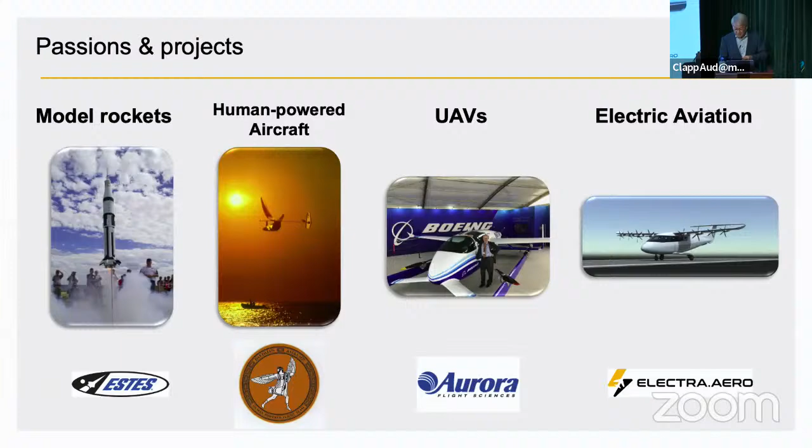And the model rockets played a big role in my upbringing, and as Day mentioned, our family had a chance to be a part of keeping that 70-year-old business going precisely because it's such a STEM education tool. A lot of human-powered airplanes, 30 years or so in the unmanned aircraft space, and now working in the sustainable aviation space, electric aircraft and the like.

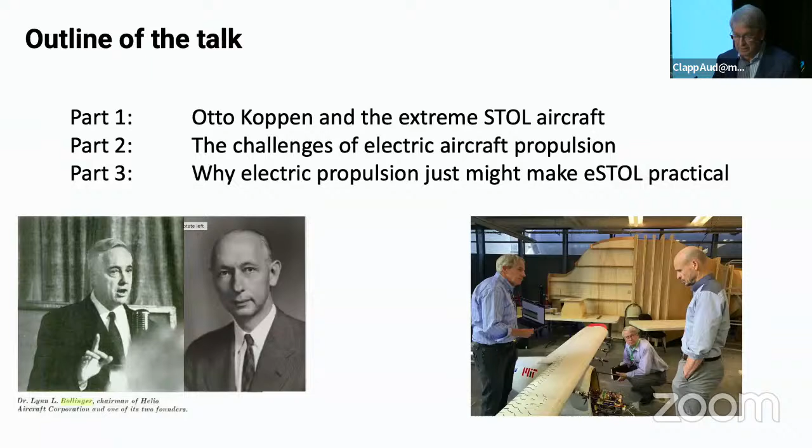What I wanted to do tonight is split the comments into three broad categories. First, to tell a local story, a professor from MIT who spent much of his life in Centerville, very close to here, and some of you may have heard of him. His name was Otto Koppen, and I'll talk about that story. I want to then get into why electric propulsion doesn't make as much sense in aviation as it does in cars and terrestrial applications, and then talk about an application where it might actually make sense that I'm involved in with a number of colleagues here. So just for reference, I'll talk a lot about a word called ESTOL, where the E stands alternately for extreme or electric, interchangeably, but short takeoff and landing.

And if you just think of normal airplanes, the commercial aircraft that fly out of Logan, those are called conventional takeoff and landing, and they use runways. They need between 3,000 and 7,000 or more feet of runway, so a pretty big space. Short takeoff and landing, you'll hear that used. Some of the things like Cape Air flies kind of fall into that category. They need between 1,000 and 3,000 feet of runway to take off and land.

Then you have your vertical takeoff and landing stuff, where helicopters are the most obvious part, but lots of other permutations on that. And those can take off in like one body length of the vehicle, so 50 to 100 feet of space. And that's the kind of stuff you fly out of the Falmouth Hospital here on the med flights back up to Boston. What we're doing in the ESTOL business is the extreme short takeoff and landing.

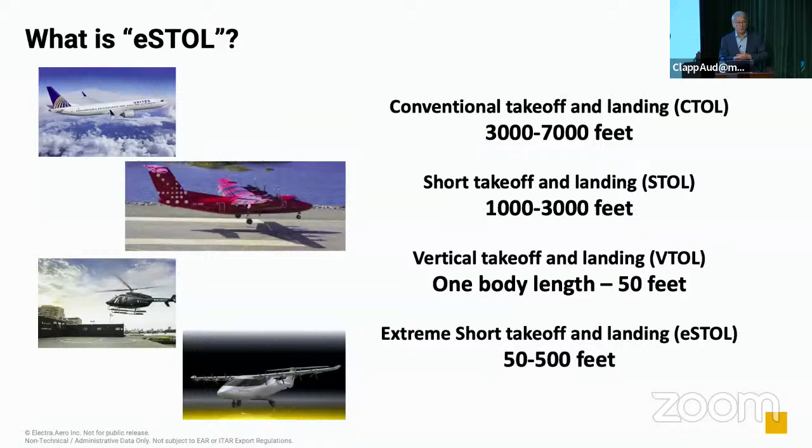So it's almost as short as a helicopter and significantly shorter than anything else that is out there. So 50 to 500 feet, which is an order of magnitude shorter space requirement than anything else. So we like to say that in that field, we're using wings, but not necessarily using runways. And that's sort of a key concept here.

So the Koppen story. Otto Koppen was born in 1900 in New York. He was part of the development of American aviation. He went to MIT. He worked for the Ford Motor Company when they were building airplanes in the 1920s. He spent most of his career on the MIT faculty, where he became one of the world's leading experts in stability and control. But what I've really come to appreciate, I heard his name when I was a student there. He had retired in the 60s and relocated down here to the Cape.

But he was a passionate advocate of these very short takeoff and landing aircraft, and teamed with a guy from Harvard University, a professor at the business school. In the 1940s, they started a company called Helio Aircraft to try to build airplanes that could take off and land in really short spaces. This is a picture of one of their airplanes, of their prototype, flying off the athletic field at MIT.

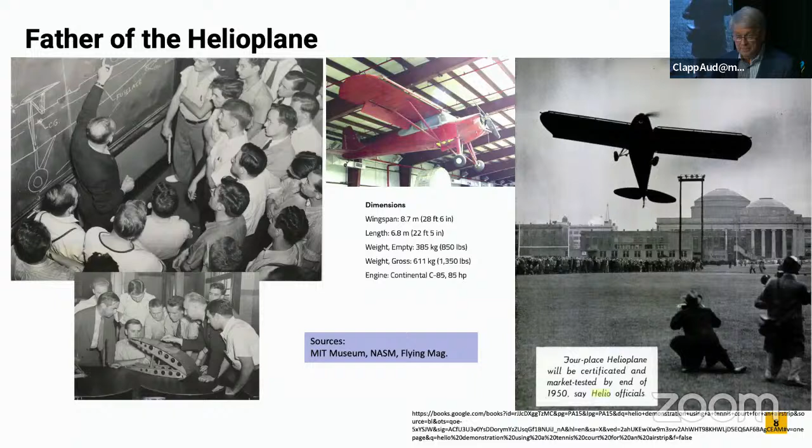And they developed that into a fairly successful business that had a lot of different versions, a lot of different instantiations of this short takeoff and landing airplane, most of which went to various parts of the military, actually. They ended up getting used a lot in Vietnam. The intelligence agencies used them a lot. And the other big user of this has been missionary organizations. People who want to fly into remote areas, land in small spaces, and deliver missionaries, people, and supplies. So those have been the two big users of these airplanes.

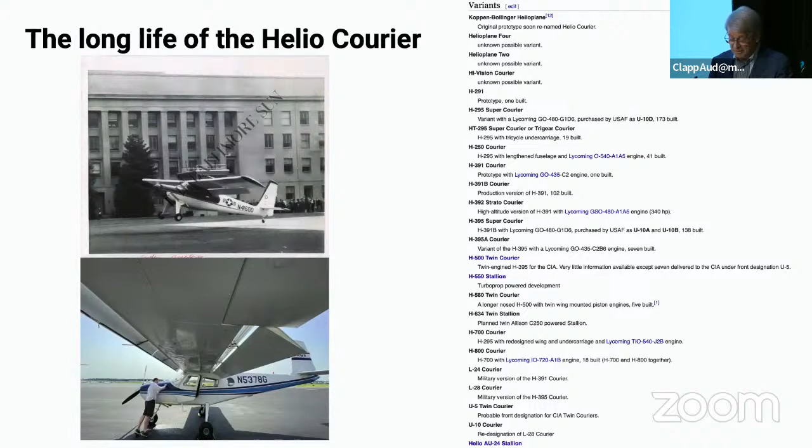So about 1,000 of these were built, and they were far from the only short takeoff and landing. These are just some of the samples. There have always been some of these. All the great powers in World War II had versions of them, primarily for taking people in and getting them out of denied areas. In the 60s, they were building them as possible urban area to urban area transports. NASA did a bunch of research in the 60s and 70s. The Air Force experimented with cargo transports.

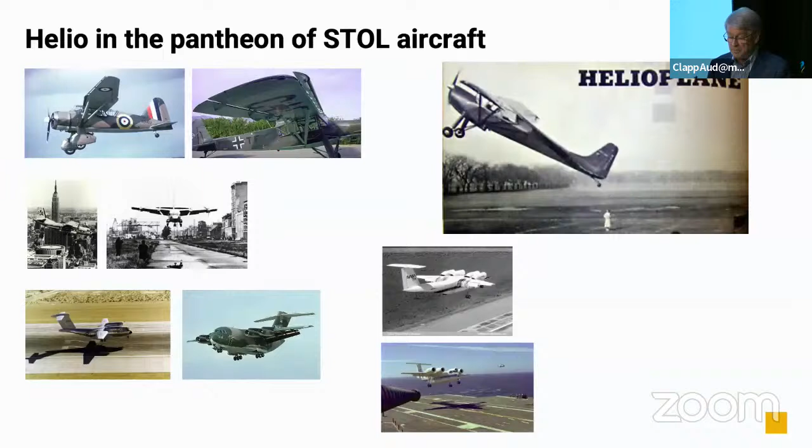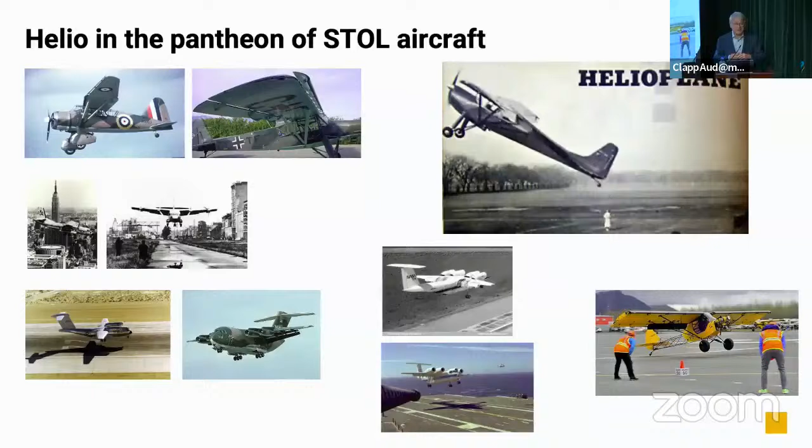And there's a competition every year that you may have seen on TV in, I think, Alaska, where they do the really extreme, like they can get off the ground in like, I think 9 feet is the record, okay? And while those are not practical airplanes, they do illustrate what the technology can do being pushed. That upper right figure here is Koppen's airplane taking off from a tennis court at Harvard University.

Now, few of you have probably ever seen one of these airplanes because they did not become mainstream tools. Those aircraft proved that the concepts worked, but the airplane itself was a lot of work to fly, physically very demanding, had a lot of flaps and control surfaces, and took a lot of the pilot to fly it.

Taking off turns out to be really easy in a short space, but landing is really tough because there's only a short space to land in. You have to hit the landing target very precisely. And again, with the tools in the 50s and 60s, that was a real challenge.

Then, in the 1950s, there was no real infrastructure for what we now would call an on-demand transportation system. Uber revolutionized things, and Uber was possible mostly because of the advent of networked mobile devices, right? The cell phones that could talk to big networks, and you could call a ride from anywhere to anywhere on demand. And that is a really powerful concept, obviously in ground transportation. It's not yet here in air transportation, but it is coming.

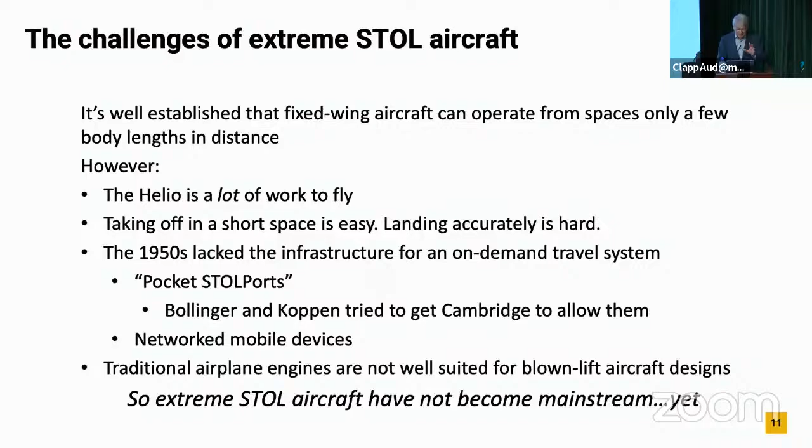And they were actually doing demonstration flights from like the Polaroid facility on Route 128 down to Logan Airport and stuff like that. But it never got to the critical mass to where it became a commercial success writ large. But it did prove out a lot of the interesting ideas. I'm going to set that aside for just a second and now talk about electric airplanes, which, I'll show you how these connect in a minute, but sort of the challenges of electric airplane flight.

And for that, you kind of step back, and there's two big themes, I think, in aviation today. One is crowding and congestion, right? Which was a lot of what has made the experience of flying. The good news is it's made it affordable. The bad news is it's made it pretty miserable because from the time you walk into the airport to the time you get out, you're in very crowded spaces. And obviously in the COVID era, that's brought with it a whole other set of issues.

Second is broadly called Flygskam, right? The flight shaming movement, writ large, the need for sustainability, the need to decarbonize the whole economy. And aviation, although it's a relatively small contributor today, 3-ish% of the global carbon emissions come from airplanes, it's a growing segment, and it's an important segment. And interestingly, it's one of the hardest parts of the economy to decarbonize because, as you'll see in a second, hydrocarbon-based fuels are just really great for airplanes.

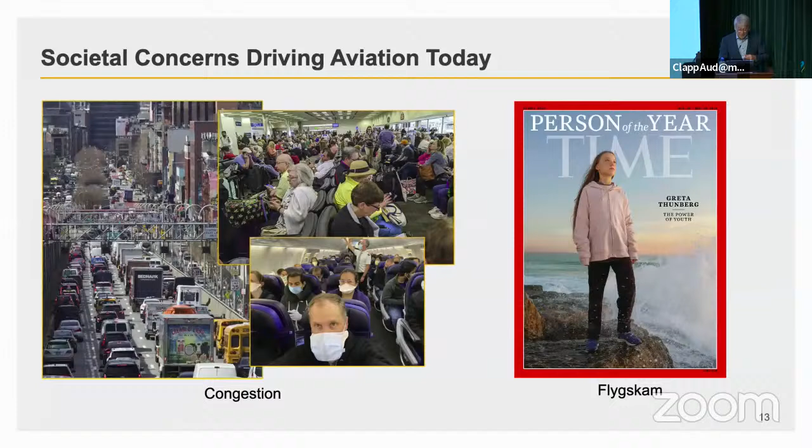So, we live in a world where electric cars are really proliferating. They've entered that stage of very rapid growth. They've moved from this sort of fringe idea, while there's always been an electric car concept out there somewhere, and more than 100 years ago, 120 years ago, there were early model electric cars. The internal combustion engine kind of won that first round, and so all modern cars have been internal combustion. But you're seeing electric really come on in a strong way.

It's still a small fraction of the total fleet, and the rate of production and dissemination is going to have to increase dramatically to get to the kind of decarbonization levels that we need to see by 2050. But it is happening there. It really is happening. So why not airplanes, right? That would seem to be the next step. Consumers, right, are interested. They don't really care what's in it as long as it's safe, it's convenient, it's fast, it's clean, it's quiet, and it's affordable. And the affordability is a really big piece of the equation.

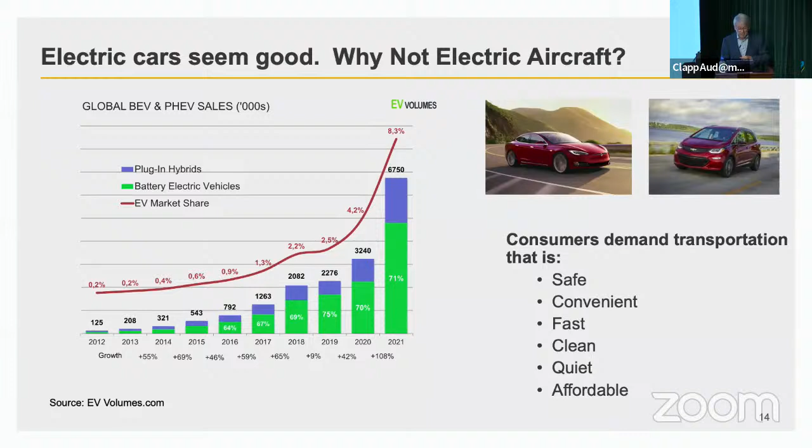And when you look at stuff, first blush, batteries look pretty good. These are sort of four major ways that airplanes could get driven around, I guess any vehicle could: the turboprop, the turbofan, battery powered, and fuel cell powered. And they start with some amount of energy on the vehicle. In this case, turboprops and turbofans, you start with kerosene, right? And then they burn it in an engine. And then they run it through maybe a gearbox and then through either a propeller or a set of fans.

And what comes out that turns into useful work, useful thrust on the airplane, is a pretty small fraction of what you started with, like 30 to 40%. So you're getting like a third of the energy that you started with on board that is actually useful. The rest of it is primarily rejected as heat. Batteries look really good.

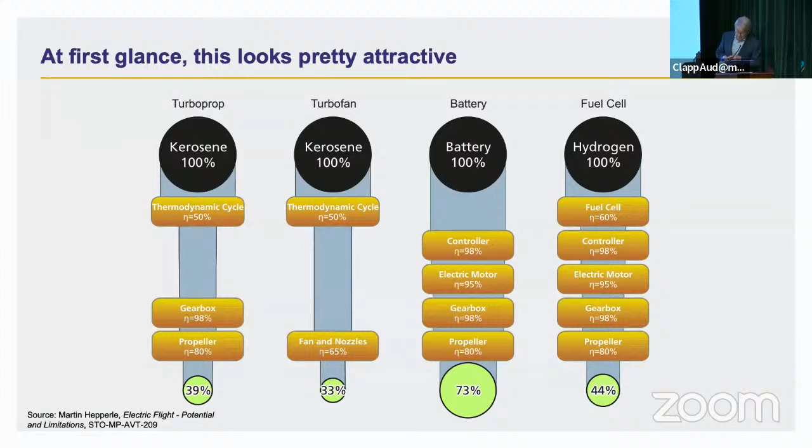They can get over 70% because the batteries are efficient, the electric motors have gotten really good, and propellers can be quite good. So you go, wow, that looks pretty impressive. And the fuel cell is sort of in between. It's not the panacea you might think because the fuel cells themselves are only in the 50 to 60% efficiency range.

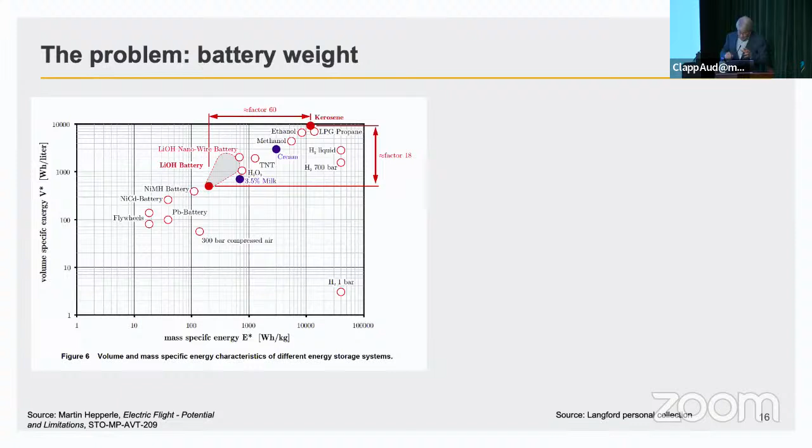Just to put it into context, one of the things we did as students at MIT was build a human-powered airplane that was allowed to have supplemental energy storage. The rules of this particular competition gave you 10 minutes before takeoff, in which the pilot could store their energy any way they wanted. So they could wind up a rubber band, charge up batteries, spin up a flywheel, whatever. Our team at MIT actually developed a hybrid electric system where they charged up batteries.

The point of this is that blue circle is the energy—where a human being falls on that chart. The pilot was also the engine of this airplane, and where he fell on that chart is that big blue circle. So you can see, only slightly better than batteries of the day.

That sort of makes the point that humans are pretty lousy airplane engines. They're good pilots, but poor engines. But the batteries are in that same kind of ballpark—they're a lot closer to the human than they are to kerosene. So nobody would seriously talk about human-powered airplanes as a practical transportation device, and so you have to start to be a little careful when you talk about batteries as practical airplane devices.

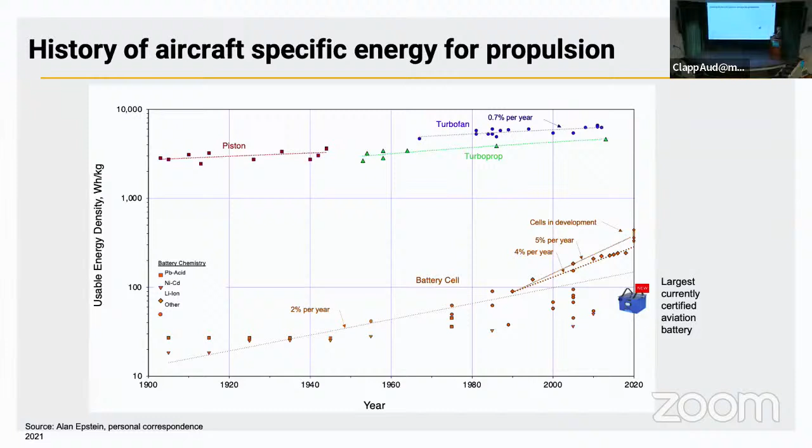And then the batteries get worse as they age. If you think of your cell phone, you replace it every couple of years because the battery really begins to die after hundreds of cycles. It's not thousands of cycles, which is okay for your cell phone maybe, but on an airplane, it's going to be very expensive to replace that quantity of batteries.

And then when you actually go fly the airplanes, you have to have reserves, right? Airplanes never land, or almost never land, completely out of fuel. They have very strict reserve criteria depending on the type of airplane and the type of mission it's flying. A typical airplane may land with half the energy it took off with still on board, less on the really long-haul airplanes. But the 737s that you fly from Boston to Orlando, that airplane probably lands with half the energy still on board that it took off with.

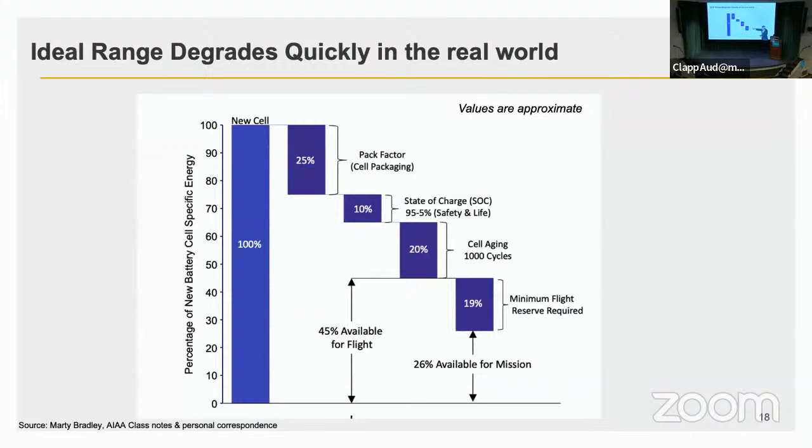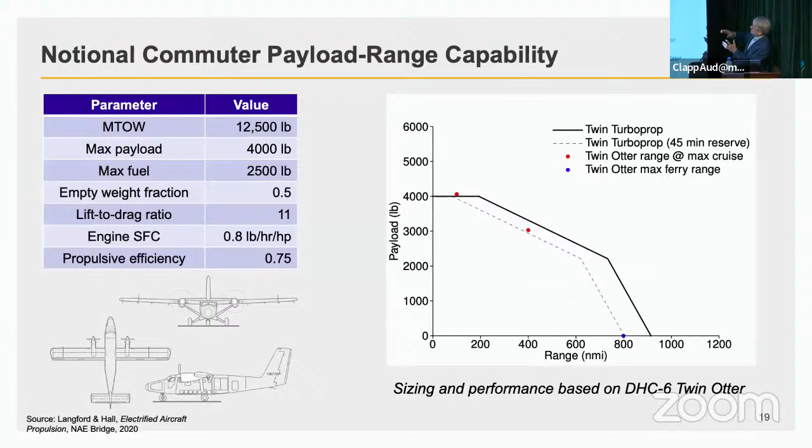So when you actually factor all this in, you're going to have somewhere between a quarter and a half of the energy of your great cell that actually makes it into the airplane. And what that does is it makes it a tough sell on the battery to make an electric airplane. You will see people who take airplanes and make them electric, but what they don't really tell you is how bad they got as a result in terms of performance.

This is a Twin Otter. It's a commuter class airplane. I don't think Cape Air flies any Twin Otters, but there's a lot of them around. And this is what's called a payload range curve. It shows how much payload, how many people, versus how far. And that black line is what the airplane can normally do.

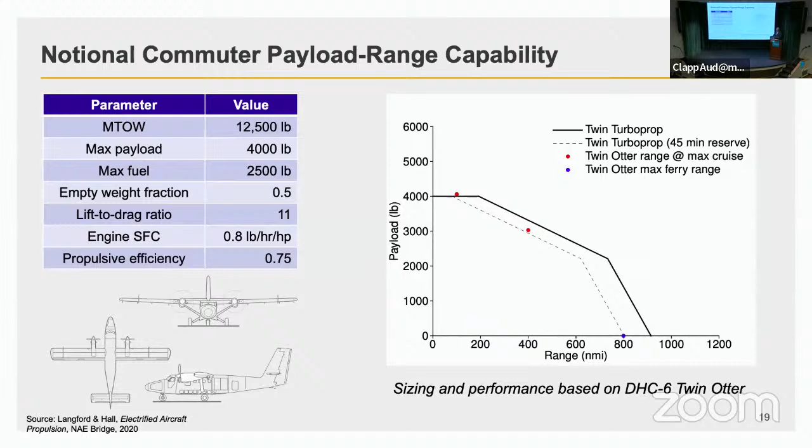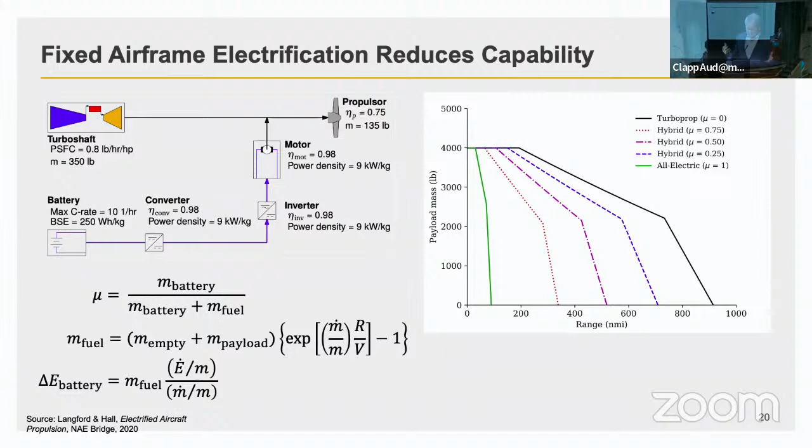If you make it electric, this chart shows how much is coming out of fuel and how much is coming out of batteries, and you get a series of curves until you reach the pure battery version. So a battery-powered version of this airplane would have the performance shown in green, and a fuel-powered version would have the performance shown in black. That is a substantial decrease in the performance of the airplane and thus in the economics. It's very scenario specific, about comparing different ideas and technologies.

But this is the system where you put everything in together. This turns out to be really important for hydrogen. People like to talk about hydrogen, which has two big problems. One is most hydrogen today, essentially all hydrogen today, is not green. It's made by a reforming process that produces a lot of CO2. And the second is that you got to store it on the airplane, and then you got to count the weight of whatever you're storing it in, along with the weight of the fuel. And that's what makes hydrogen look pretty bad in a lot of these trade studies. Not as bad as batteries, but still significantly below all the different options for the existing fuels.

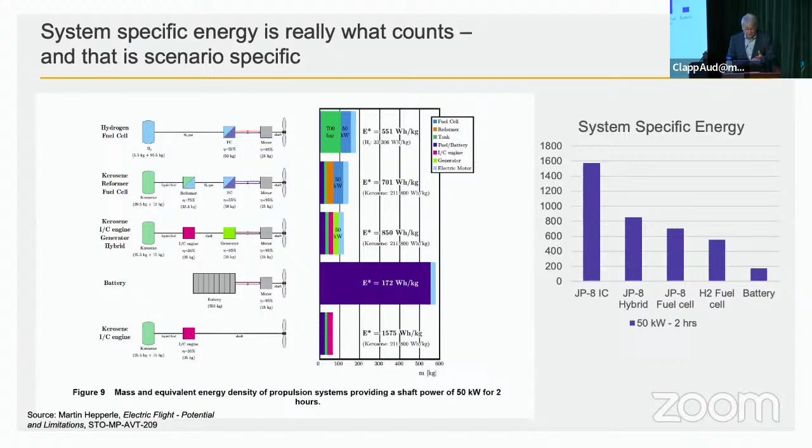This is another way of looking at it. This is basically a chart of range versus how much payload you can carry on the airplane, and overlaid on this are a series of contour lines of the energy density of the fuel. So if you could store, that's 100 watt hours per kilogram, so that's 10, 100, 1,000. And pure jet fuel comes out here, it starts at like 12,000.

And so you can see a bunch of the existing airplanes are all plotted on here, and they have long ranges, and you can see the longer the range, the lower their fraction of payload. That makes sense. The longer the range, the higher the percentage of fuel on board. And then you kind of go back and look at this, these are the commercial drones that you've probably seen flying around, the little quad rotors. They're way down here in terms of what they can do.

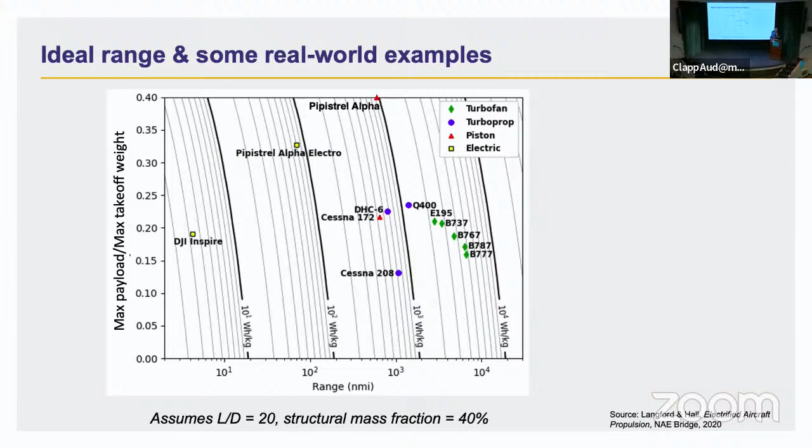And there's only one currently certified electric airplane that you can buy, and it's in the light sport category. It's made in Slovenia, and it's that yellow square called the Pipistrel Alpha Electro. Fortunately, they make that airplane in two versions, a battery version and a fuel version. The fuel version is the red triangle, and the battery version is the yellow square. Otherwise, they're exactly the same airplane. So you can see how these things translate from theory into practice, and essentially what the penalty that's being paid for electrifying the airplane is.

It shows up in, it's complicated, but payload and range, endurance. One useful way to look at it is how much useful work that airplane can do. And again, this is about a factor of 6 between the electric version and the conventional fuel version of the same airplane.

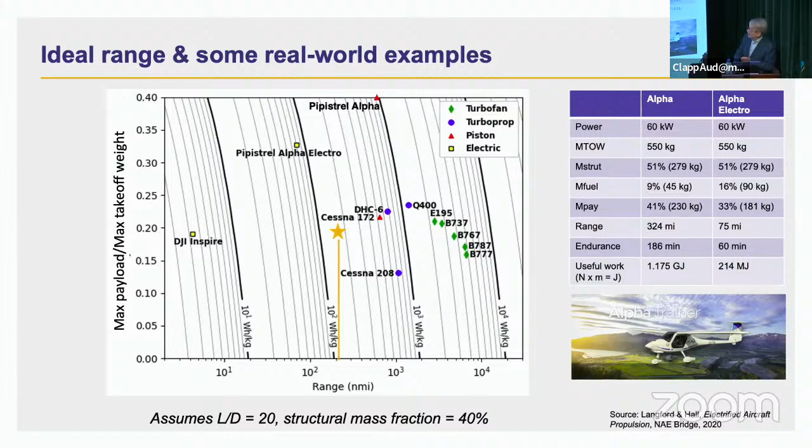So why would anybody do this, right? Why would you do electric? There's 3 reasons that I can think of and see in this. One is that the market may require you to do this, right? Market unlocks, where you may be regulated to where you can only have 0 emission airplanes.

The second is that there are niche markets where it might make sense. Trainers, for example, where you don't really care about the performance. All you're going to do is take off and land all day and just fly around the pattern, and you can recharge between a bunch of short flights. Or these high altitude, long endurance airplanes that stay up for months. And maybe these urban air mobility things.

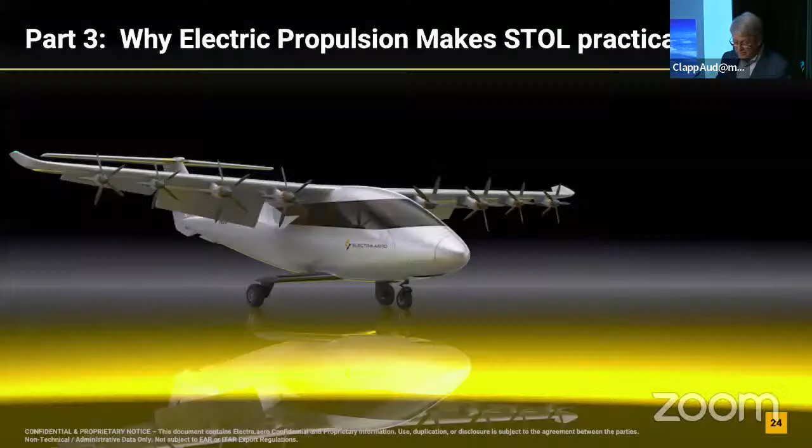And then the final thing is this performance through integration, where what the electrification does, the electric motors does, is they allow you new freedom as a designer to sort of decouple the whole idea of the way airplanes are done today, where airplane companies build the airframe, engine companies build the engine, and they stick them together. So you have this tube and wing kind of concept, and actually integrate the electric motors into the airplane in ways where the aerodynamics and the propulsion begin to interact in ways they never did before. And that is the third part of this. That's what we're doing. That's where we think this short takeoff and landing and electric propulsion may be a combination that really makes a lot of sense.

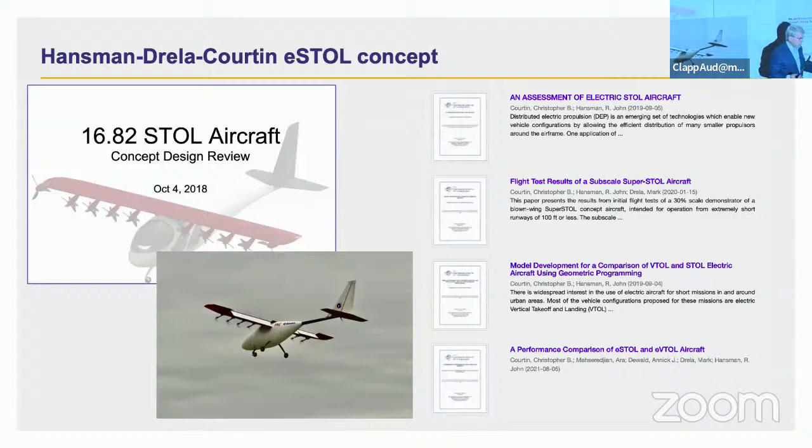So that's kind of part 3 of what I wanted to talk about. This thing started back at MIT, I mentioned Professor Koppen, but the modern equivalent are 2 professors, John Hansman and Mark Drela, who about 5 years ago said, hey, what if we took this idea of having lots of small electric motors, but instead of trying to use them as a helicopter thing, we used them to what's called blow the wing, to make the wing have a very high lift capability. Would that be a good idea? And they did a bunch of studies, and it turns out that it actually is a really good idea.

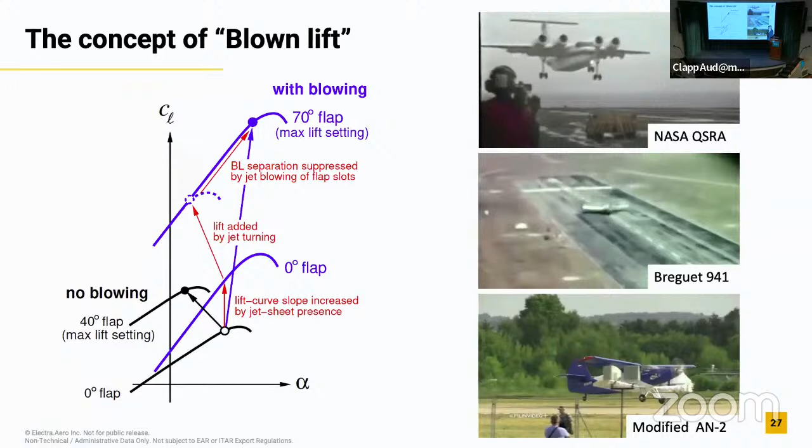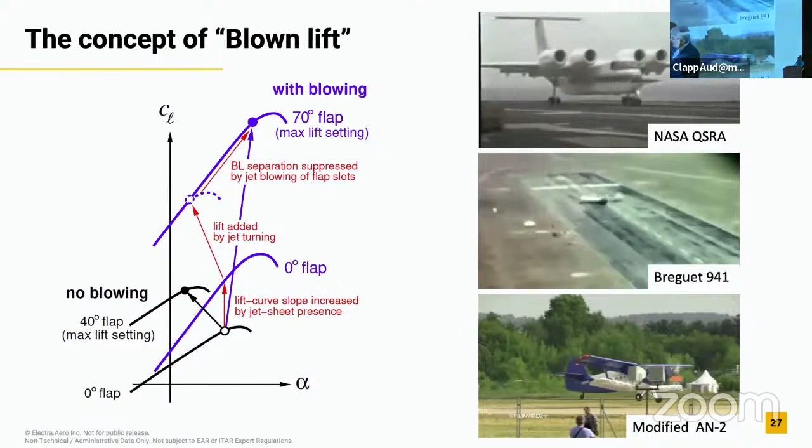And that gets you data down here. This is the angle of attack, the angle that the air hits the wing, and you have different flap settings that you can set. Higher on this curve is good. So here's a basic airplane, and when you put the flaps down, it can get a higher lift coefficient.

By combining the propulsion and the wing aerodynamics together, you can move these black curves up to these blue curves, and you can get numbers that are 5 to 10 times more lift off the wing than you can get off of a normal airplane.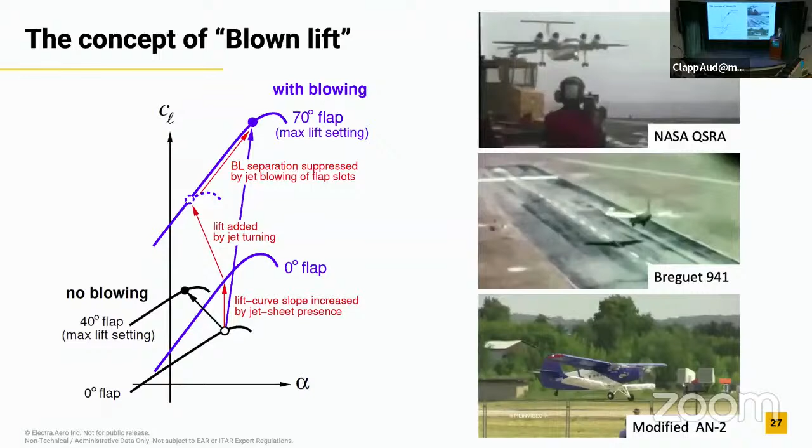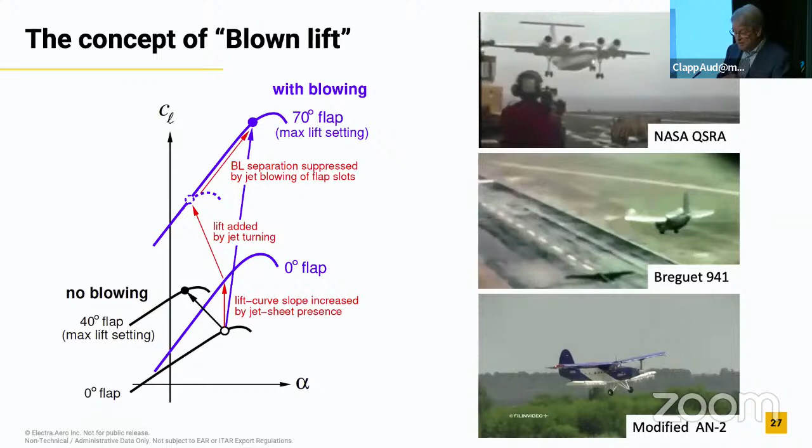That takes this idea of super short takeoff and landing and really amplifies it. These high lift coefficients allow you to fly slowly, and flying slowly allows you to land in really short spaces. That's really the idea of what we're focused on: being able to land in almost the same amount of space helicopters can operate on.

So you could—not the space of one helipad, but often there are multiple helipads right next to each other. The target design point we have is the Wall Street heliport in Manhattan. There are 3 operational heliports today in Manhattan, and each has space to accommodate multiple helicopters—enough space that if you could fit one of these super short, extreme short takeoff and landing airplanes into something about the size of a soccer field, you could take off and land normal winged airplanes in places today you can only land helicopters.

And if you can do that, you can operate in all kinds of places, including parts of large airports where you don't have to wait in line to use the big runways. You can get in and out of these vertiports that people are proposing, and in and out of roads, soccer fields, and the tops of parking garages and stuff like that. I mentioned at the beginning of the talk that there's a lot of interest in this field.

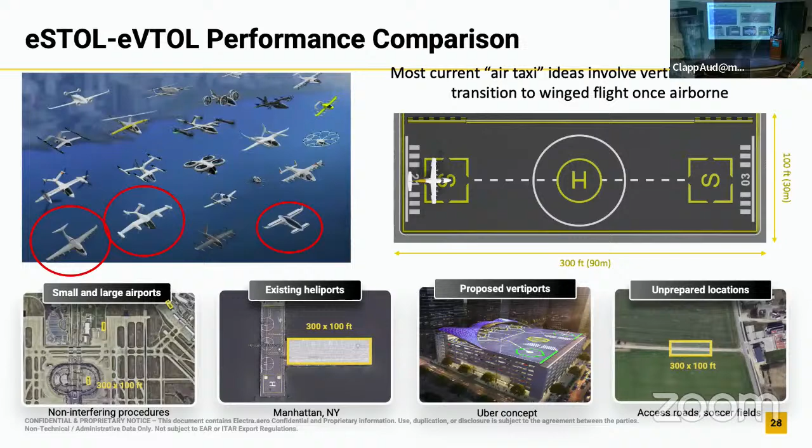A lot of people are pursuing that, and a lot of money has been poured into it. We'll see how the progress comes out. Our analysis is that you can always beat the vertical design with one of these short takeoff and landing designs, as long as you can afford a little bit of real estate. If you can get 300 feet of space, you can beat these things by very substantial margins.

This is comparing 3 basic concepts used in these different ideas, trying to normalize them all to one weight of airplane—going for a 6,000-pound airplane—and asking how much payload could I carry if it's battery or hybrid, across these 3 different designs. You can see the short takeoff and landing gives you on the order of 2.5 times the performance that the vertical designs give. That's just basically driving through the physics, and that advantage gets better the bigger you make the airplane, so it scales up nicely.

These are 3 different conceptual designs, but they're tied to real designs that are out there. In this case, being low is good—this is the weight of the whole airplane needed to carry a given payload size. 500 pounds is like 2 people, and 2,000 pounds gets you up to about 9 people. This shows how much the airplane would have to weigh to carry that much payload for, in this case, 300 miles.

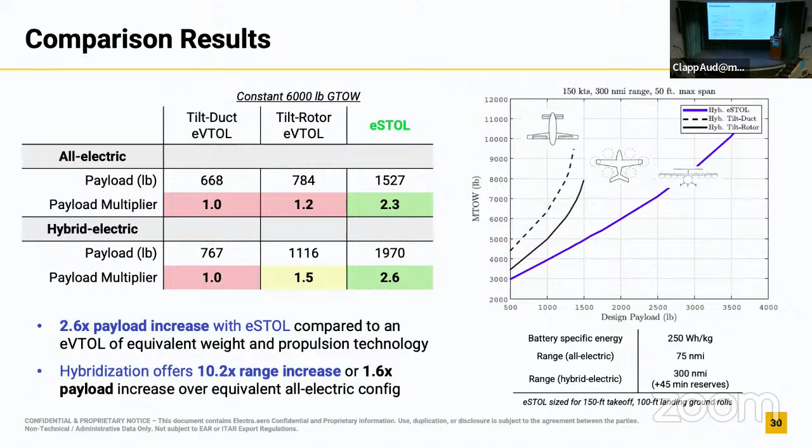And this curve is a little different depending on the exact scenarios you pick, but the trends are very similar. And that's the basis for our idea that this short takeoff and landing is economically much better than the vertical takeoff and landing designs.

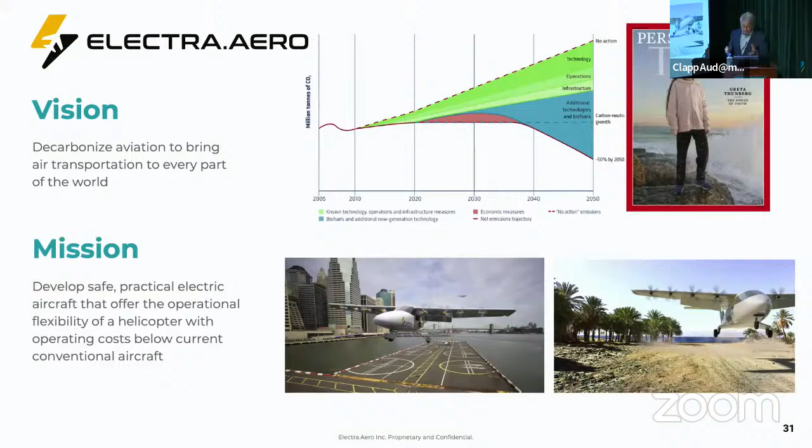So that's kind of the basis of what we're doing today with this company called Electra, that we started with the idea to be a part of decarbonizing aviation, starting by developing these urban and regional mobility solutions that can operate everywhere from Manhattan, the Wall Street heliport, to really unimproved fields in remote areas. And we do that by a hybrid propulsion system.

Think of it very much like the Prius, where you have a battery and a fueled engine. In our case, it's a turbo generator, so it's actually a small jet engine, but instead of making thrust, it drives an electric generator. And those two together feed a power bus that drives a bunch of electric propulsors.

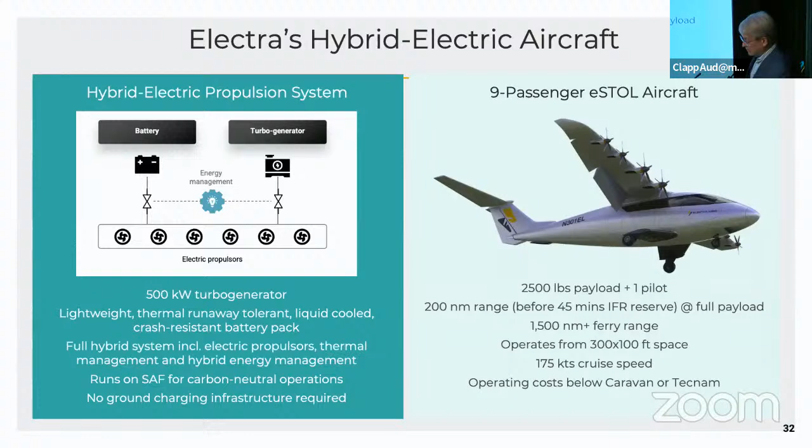Those electric motors are lined along the front of the wing, and they provide this blown lift. That ends up getting incorporated in an airplane that can seat about 9 people, with an average stage length of about 200 miles, although it can fly much further than that if you take some of the payload out. But for these missions, the 200-mile range seems like a good compromise point.

And then all of the throttle settings, the moving of the throttle, the extra power for takeoff and landing and stuff like that, that all comes out of the battery. And that has a bunch of improvements in maintenance costs, basically.

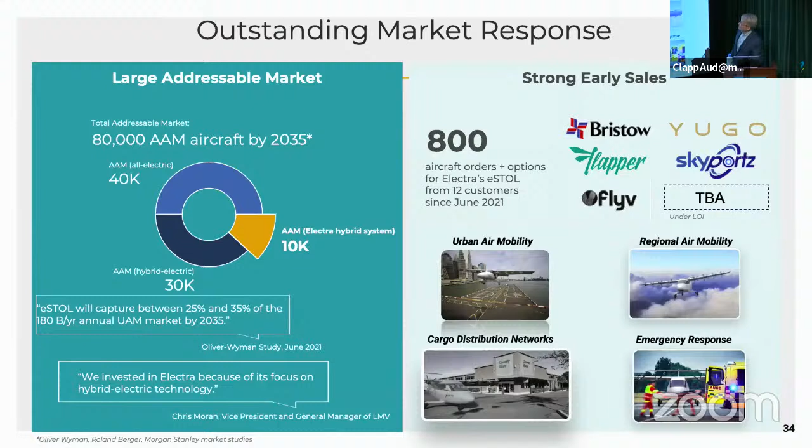The market for this, if you believe the marketing, the companies that study these things for a living, the consulting companies, is very large. They have numbers that start with trillions over 10 and 20 years, and numbers that talk like 80,000 airplanes and stuff. That's part of the reason a lot of venture money has flowed into this area. Those are very large numbers compared to anything that's ever been done in aviation.

Remember the story of Otto Koppen? They built 1,000 of those over 30 years, and essentially it's the closest anybody has ever done to what this is trying to do. But big dreams, a lot of people interested in it.

We started, about last summer, showing this short takeoff and landing design, and it's gotten a really good market response, not just in urban air mobility and regional air mobility, but also in how you move cargo from distribution points. Like if you think of cargo distribution, Walmart has like 4,000 distribution centers, not stores, distribution centers, most of which are not on airports and therefore are served only by truck or rail.

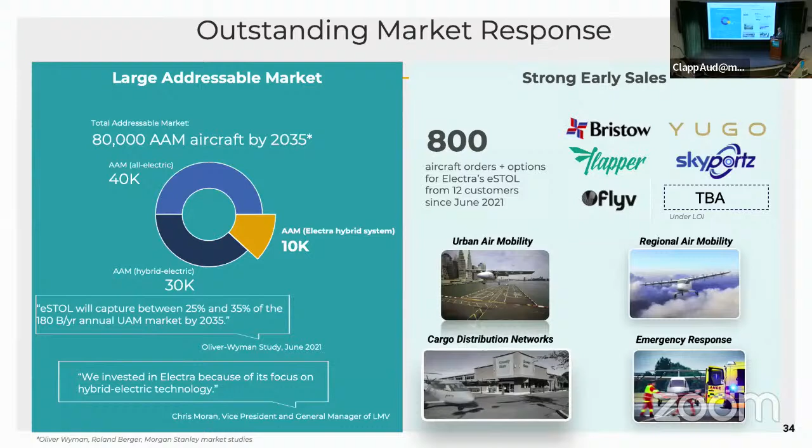But with an airplane like this, you could land in a section of the parking lot, you could land on a section of the roof, and you could provide a private cargo distribution network sort of on demand to all of the different retail organizations that need it. Say nothing of emergency response. You'd be able to fly these things off the docks here in Woods Hole, for example. There's been a lot of interest from the U.S. government in this. The U.S.

Government has a great program that promotes small business innovation, and there's been a lot of military interest, not only in getting in and out of areas that are hard to get to and that you don't want people to know you're going in and out of, but also for this idea of expeditionary power. The first thing a unit of soldiers worries about is ammunition, but the second thing they worry about these days is batteries and electrical power.

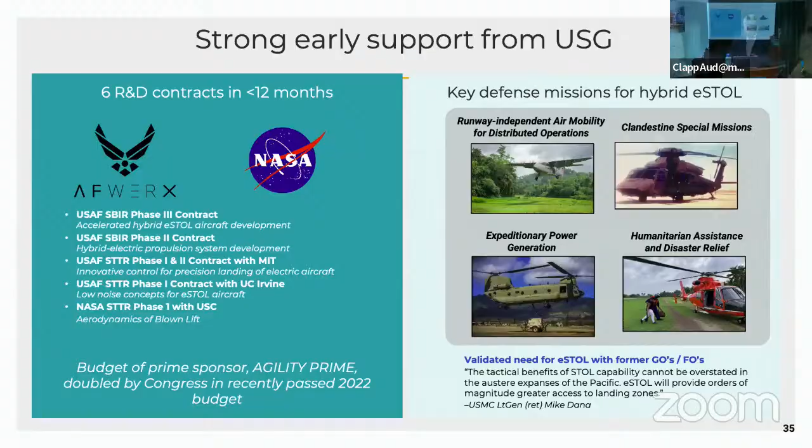And that is a 5-kilowatt generator underneath a CH-47 helicopter. And this airplane, the plane we're developing, would be a 400-kilowatt flying generator that could self-deploy. So that has actually gotten a lot of interest from defense. And for missions like this, this is how you would fly out of Poland and land at the presidential palace in Kyiv, where there is a parking garage, a soccer field, all the kinds of places that you would need to get in and out of.

And you could do that, the whole idea of this is, very, very quietly. If you go in a helicopter, everybody knows that you just landed in a helicopter, and that is why they're not really publicly acceptable in populated areas, and why militarily they're not very useful, because if you want to do a mission secretly or quietly, the helicopters have real challenges.

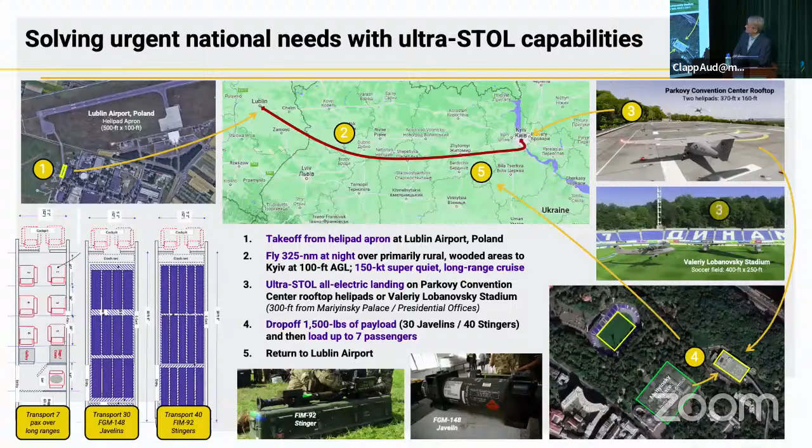So we're in the process of building models and doing propulsion test beds. We have the whole system running on the ground, and we're building a 2-seat demonstrator and a prototype with the idea of actually having a product in like 2027, and that's what we think the product looks like. This is why we think it's a great idea.

This is this payload range thing of how much it can carry versus how far. These are the eVTOL designs down here in this corner. That's a Bell 429, sort of a standard helicopter, a standard Cessna Caravan, and what we think we can do with the hybrid electric blown lift design, and we can do this at operating economics that beat the Caravan.

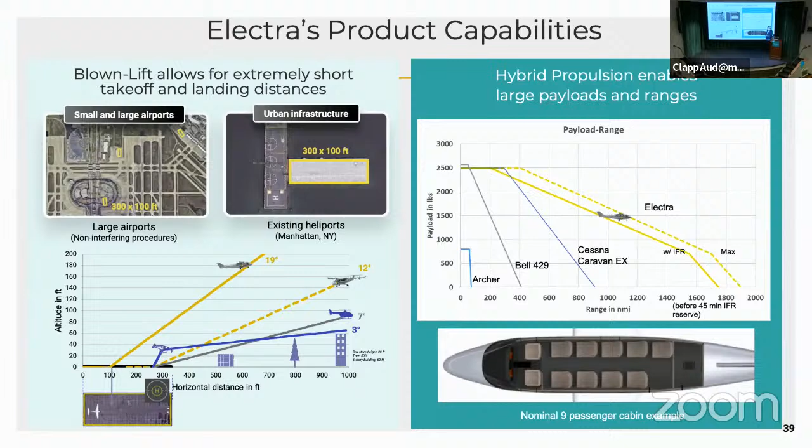Helicopters have about 5 to 7 times higher per hour costs than fixed wing airplanes. So the operating flexibility of a helicopter with the costs competitive with the fixed wing is really what we're focused on. And so this is the last chart, and we'll open it up to questions. But I just think it's kind of a fun story that shows how most of these ideas are not new in and of themselves. This is an idea that was tried 70 years ago by people at MIT and Harvard.

And the question is whether the evolution of technology has moved far enough to now make it a viable transportation mode, right? What's changed? The blown lift, the distributed electric propulsion, the hybrid electric, the computers and controls and satellite navigation that allow you to land precisely where you're trying to land, and this idea of networked mobile devices so you can have this all be an on-demand service. It's part of what makes this an exciting time in aviation.

As I mentioned, there are well over 100 concepts going after this market. There's probably 20 or 30 companies, probably 10 of them fairly well funded, and nobody knows who's going to be the winner in this, whether any of them are going to work, whether all of them are going to work. And work means technically, but also as a business model, which is really what it takes to become a product or a service. And that's part of what makes it a really exciting time in aviation.

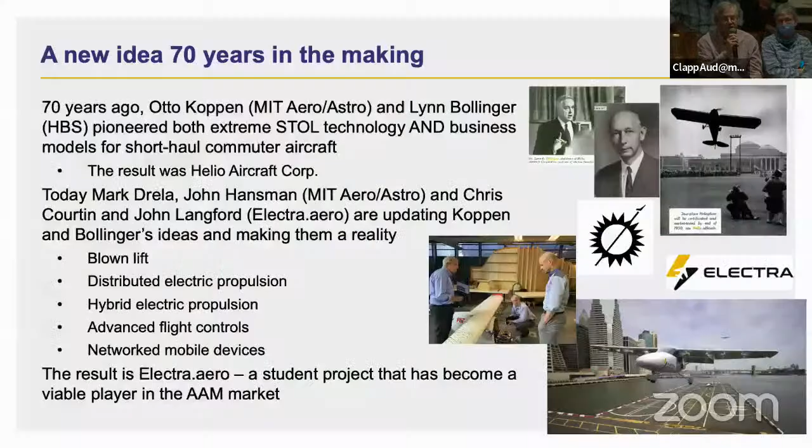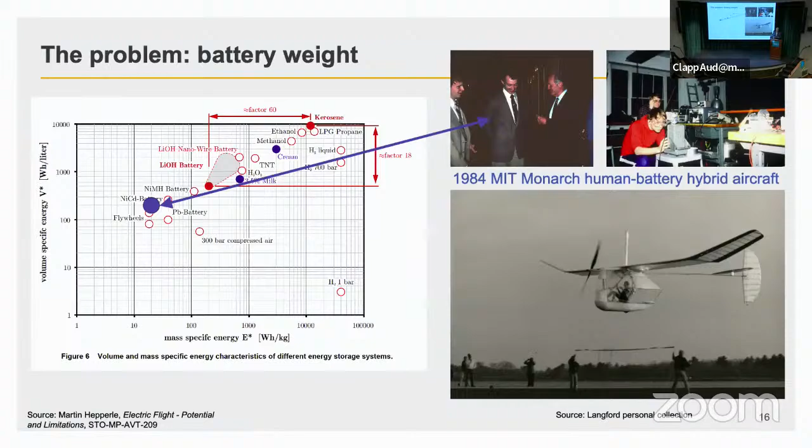Very nice. Lithium is, I guess, the highest energy density technology at the moment for batteries. Is there anything on the horizon that will do better in terms of energy density and weight for aircraft propulsion or any other application? Yeah, it's interesting. I had always made the assumption that in the airplane business, we didn't really have to worry about batteries because the car people would develop them for us. And that's changed a lot, mostly through a paper I was fortunate to be involved in that was a combination of battery engineers, battery scientists, and airplane people. I'll refer you to it; it's a paper that came out in Nature on January 26th.

And the answer is, yeah, there's a couple of different promising technologies that still involve lithium, but different cathodes in there that could make some pretty decent breakthroughs, because aviation is less cost sensitive than automotive, right? The automotive focus is how you scale up and make decent batteries in large quantities. It's all about cost for the automotive side. Aviation is more willing to pay for performance, and when you're more willing to pay for performance, there's more options, and a lot of them haven't really been explored yet.

So I think, yes, there are some things in the lab where you could see some real improvements. Now, what is a real improvement? Maybe a doubling. You could get to 600 to 800 watt hours per kilogram. That'll still be far below conventional fuels, but it starts to make regional airliners not completely crazy as rechargeable. I don't think any of the batteries covered in this paper are good enough to make a 737 electric, and if it's in the lab today, it's a decade away from being in real service.